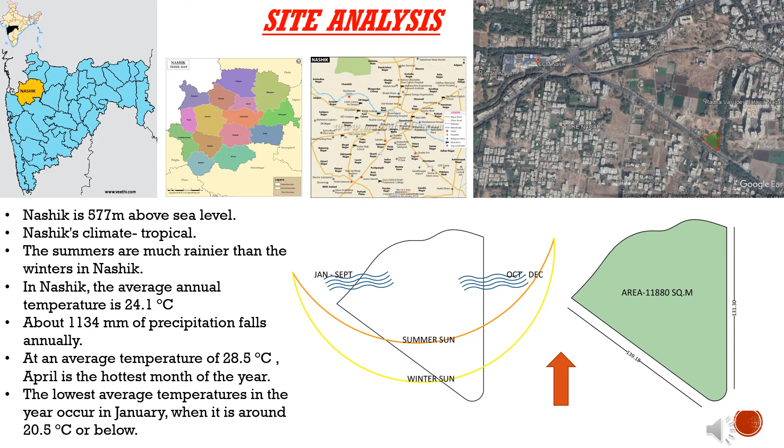The total area we have is approximately 11,880 square meters. The site on two sides has roads, one of 24 meters and another of 30 meters. It is connected to a circle which creates a chaurasta. It is connected to the highway and to the city center mall, which is a big place in Nashik right now.

Case study of Dandaji market, located in Central Africa in Niger. Total area is 7,530 square meters. The basic need to provide this market was that generally in Niger they have a weekly or monthly market. So to overcome this problem, a daily based market was to be built.

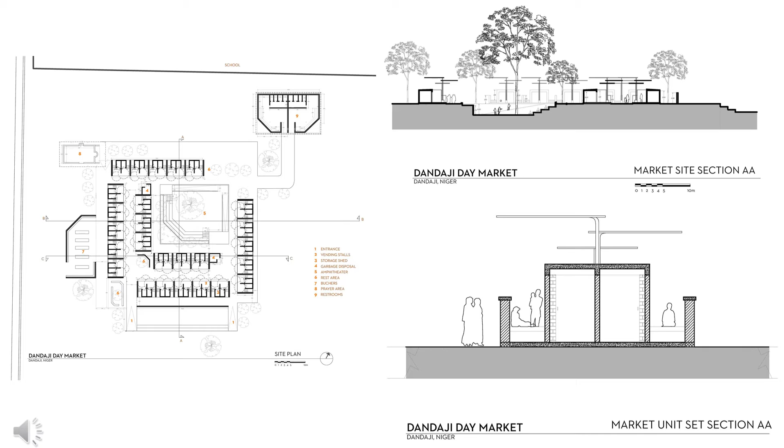This was Dandaji market, built for the local people there. It was made using metal sheets which acted as solar panels, with colorful sheets which acted as trees, covering shades also, and were used for the electrical purpose of nearby villages. The market is very simple, but they played with the ancestral trees which were already placed there, and they didn't remove them. They used it very beautifully in their design.

The internal shops are 0.6 meters above the ground level. Talking about the parking, two-wheeler and four-wheeler parking are provided near the entry so that people can park their vehicles and directly enter the market. So the vehicular movement stops at one point, and the other activities get started, and it does not create chaos. It works in an order.

The green areas are provided to make the environment more lively and happening. Internally, two courtyards are provided where one has a step-like profile and can be used for sitting purposes, and nearer that, two eatery shops are provided, one of which is also a bakery shop. From there, people can enjoy their time.

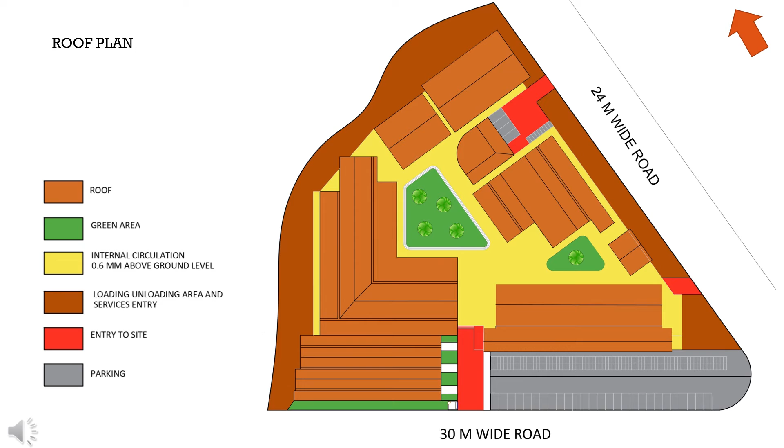Every shop has been placed on the ground floor because it becomes easy for the customer and the vendors to access it properly and easily. When we enter the site from the 30-meter wide road, on the left hand side we have a wet area.

On the first, we have a vegetable market. When we enter further inside, we have fruits and flowers market. Up next to it we have a bakery shop which also acts as an eatery. Internally we have a recreational area. On the right hand side we have the groceries and masala shops, condiments shops.

Next to it, we have provided a toilet, which is an important part. The whole site consists of two toilets separately and one toilet which is attached to the retiring room. Next to the toilet, there is a green area which again resists the smell and odor.

Next to it, we have seasonal shops and dairy products. Many of the shops are provided at the edges so that loading and unloading becomes easier for them. Next to it, we have a retiring room. Behind the retiring room, there is a loading and unloading parking where people can load their trucks.

Next, we have the last thing, which is the fish market and poultry market, as it creates more odor and smell, it is placed at the last, and the wind comes from the west side. So, according to the wind direction, it will flow outward. The loading and unloading has been maintained properly.

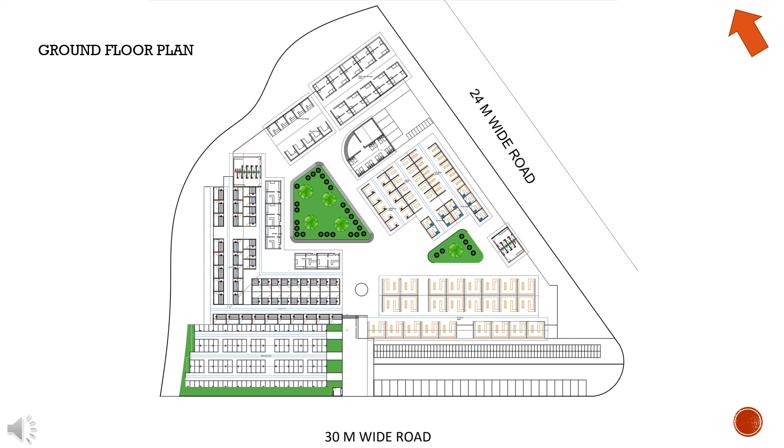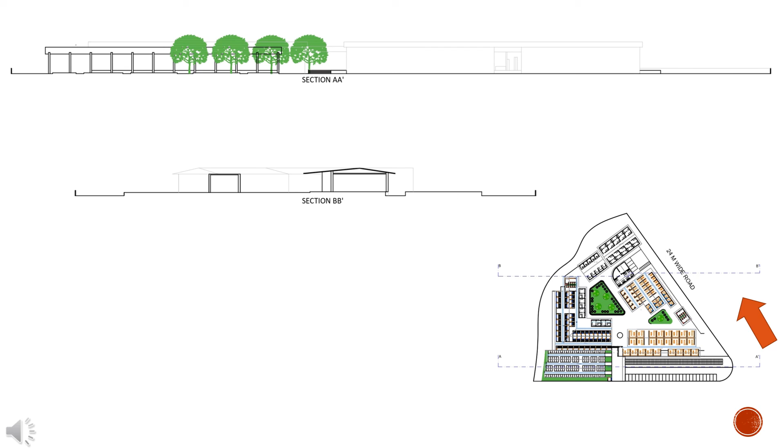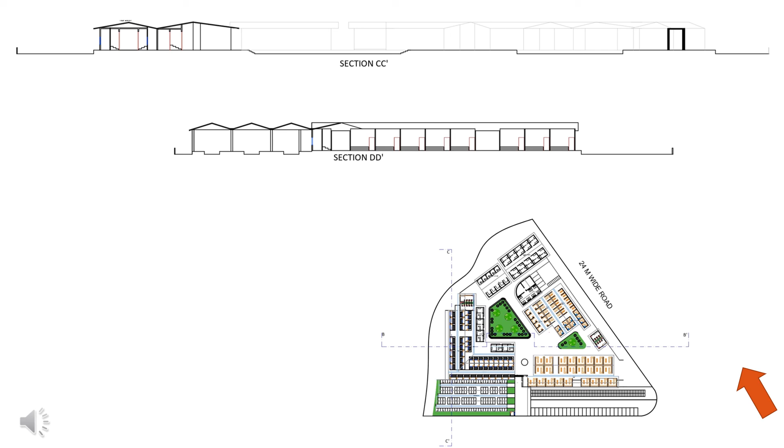Here, the first section is cut through the vegetable market and the parking area, and the second is cut through the retiring rooms, toiletry areas, and the masala and condiment shops. Here the first section is cut through the wet area and the second section is cut through the wet area and recreational space plus the toiletry areas also.